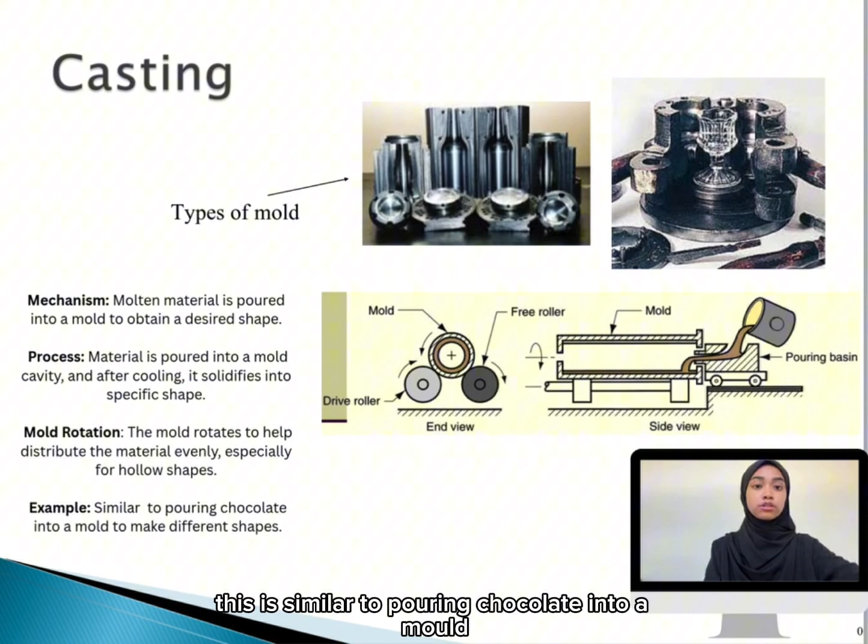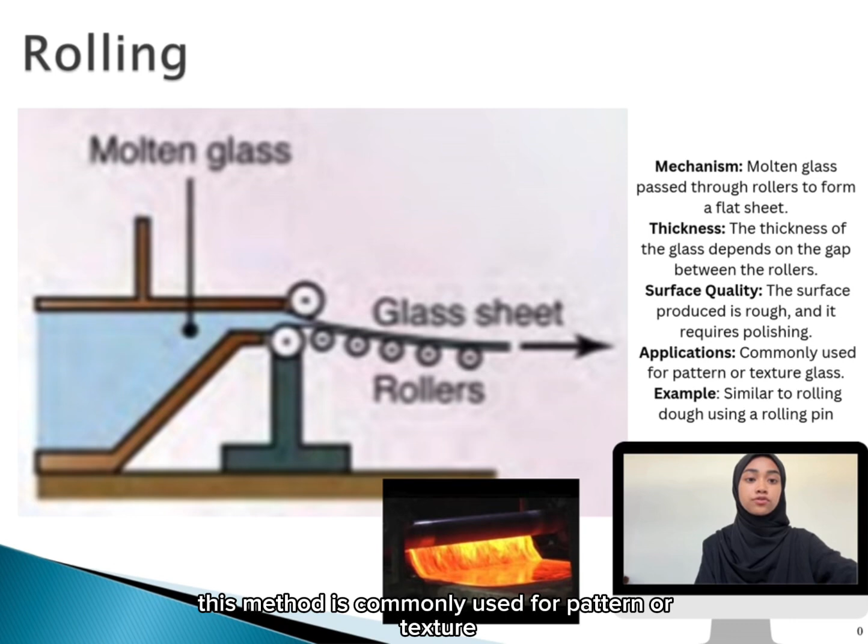Next, in the rolling process, molten glass is passed through rollers to form a flat sheet. The thickness of the glass depends on the gap between rollers. However, the surface produced is not very smooth, so additional polishing is required. This method is commonly used for patterned or textured glass. It is similar to rolling dough using a rolling pin.

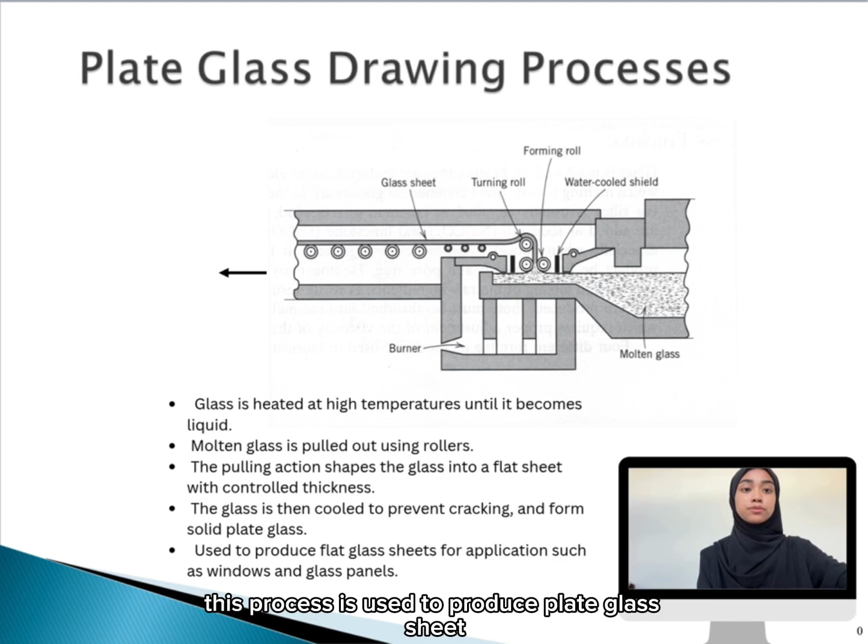In plate glass drawing, the glass is heated at high temperature until it becomes liquid. Then, the molten glass is continuously pulled out using rollers. After that, the pulling action shapes the glass into a flat sheet with controlled thickness. The glass is then cooled to prevent cracking. Finally, it forms solid plate glass. This process is used to produce plate glass sheets for applications such as windows and glass panels.

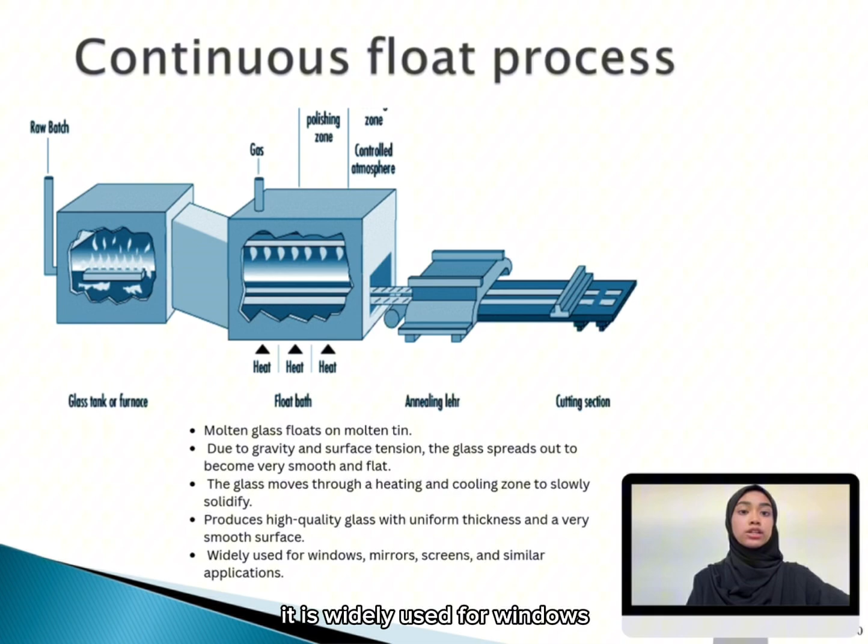Next, the float process is the most important modern method for producing plate glass. In this process, molten glass floats on molten tin because of gravity and surface tension. The glass spreads out and becomes very smooth and flat. After that, the glass moves through heating and cooling zones to slowly solidify. This method produces high quality glass with uniform thickness and a very smooth surface. It is widely used for windows, mirrors, and screens. For example, like the Apple Store at TRX.

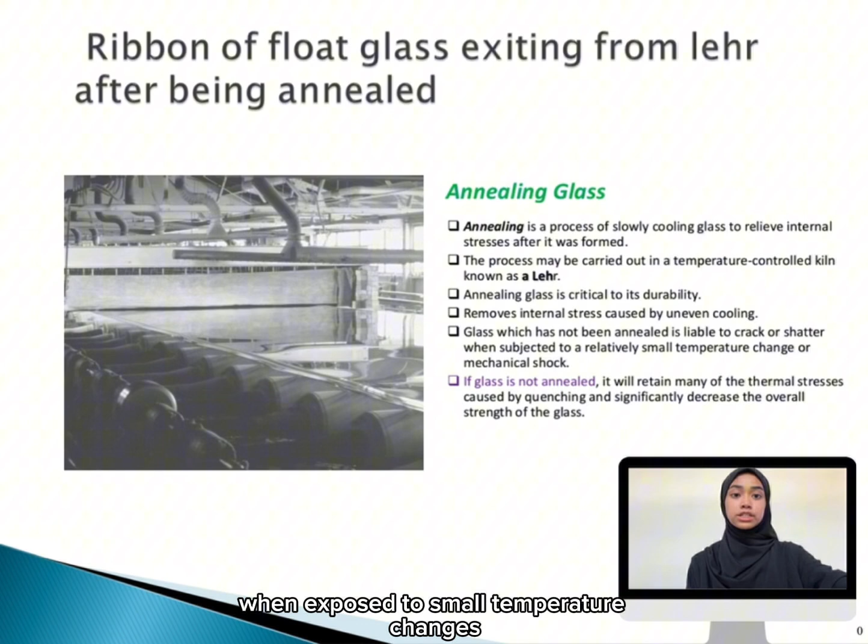Okay, next, annealing is a part of the float glass process. It is a controlled process used to remove internal stress in glass. Annealing is a crucial step in the float glass process to ensure the final product has good mechanical strength and is free from internal stress. Glass that is not annealed can easily crack or break when exposed to small temperature changes or impacts. If glass is not annealed, thermal stress from quenching remains inside the glass and reduces its overall strength.

So, let's look at the differences between the rolling process and the float process. In the rolling process, molten glass is passed through rollers to form a flat sheet. The thickness of the glass is controlled by the gap between rollers. However, the surface produced is usually rough and may require polishing. This process is simpler and cheaper and commonly used for patterned or decorative glass.

In floating, molten glass floats on molten tin and spreads naturally to form a flat and uniform shape. This method produces glass with a smooth surface without polishing. It is widely used for high-quality applications such as windows, mirrors, and modern building glass.

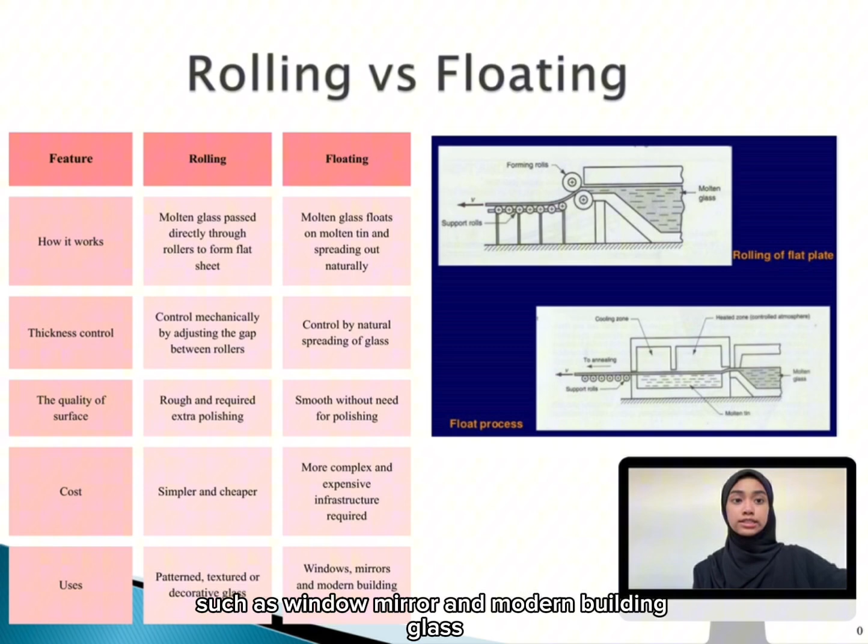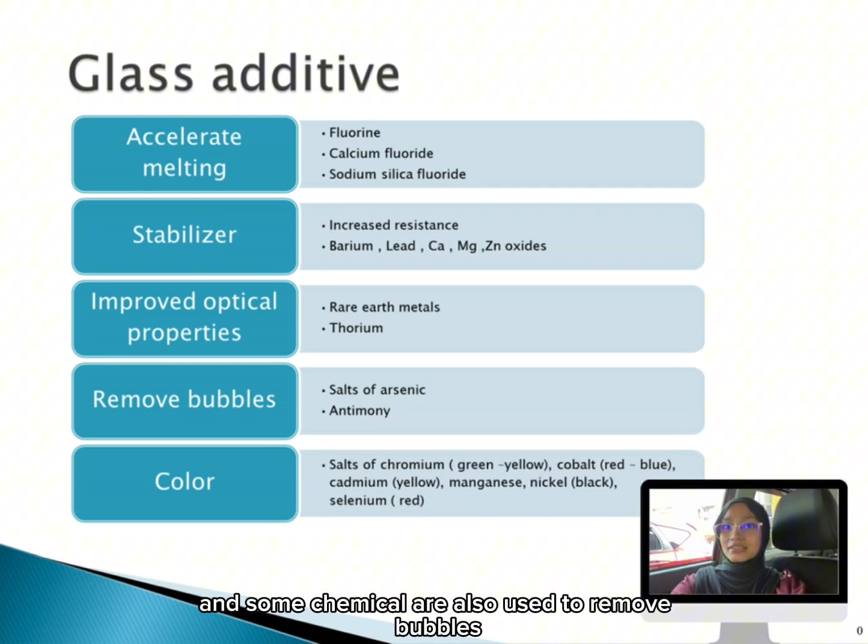First, chemicals are added to glass to improve its properties. For example, some chemicals help the glass melt faster, which saves energy during production. Others act as stabilizers to make the glass stronger and more durable. In addition, certain elements like rare earth metals improve optical properties, making the glass clearer, and some chemicals are also used to remove bubbles, while others give colors such as green, blue, or yellow.

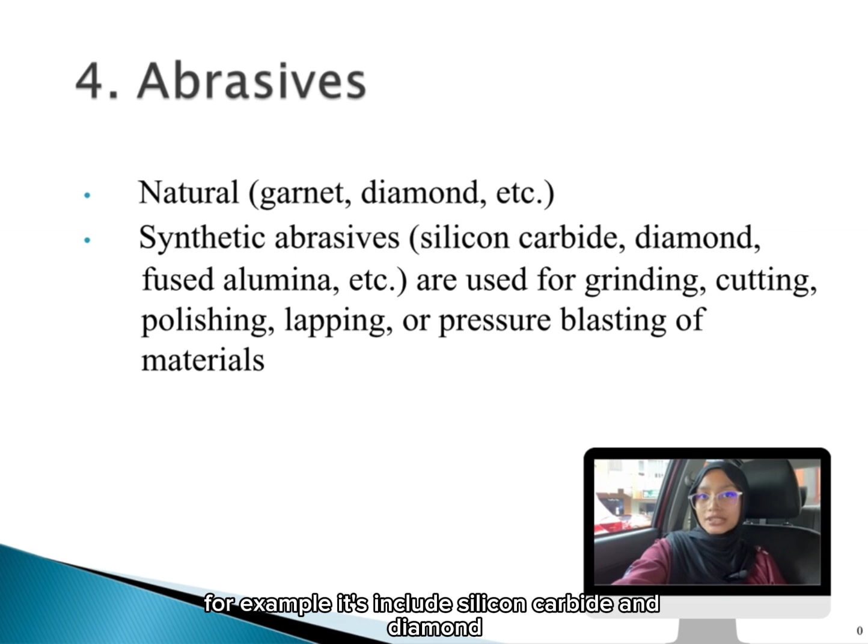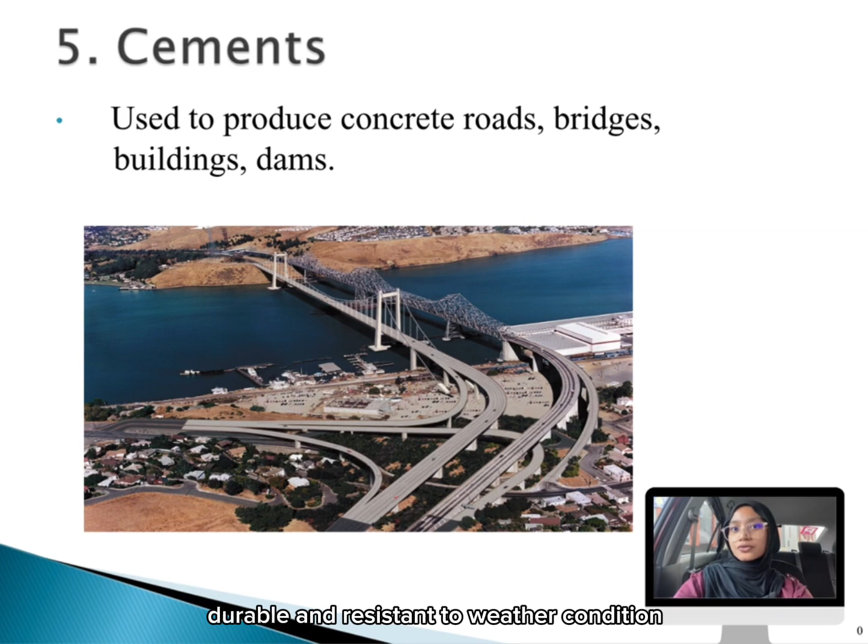Next, ceramics are widely used as abrasives. Because they are very hard materials, they are used for grinding, cutting, polishing, and cleaning surfaces through friction. For example, these include silicon carbide and diamond. Ceramics are also important in construction. They are used in roads, bridges, buildings, and dams because they are strong, durable, and resistant to weather conditions.

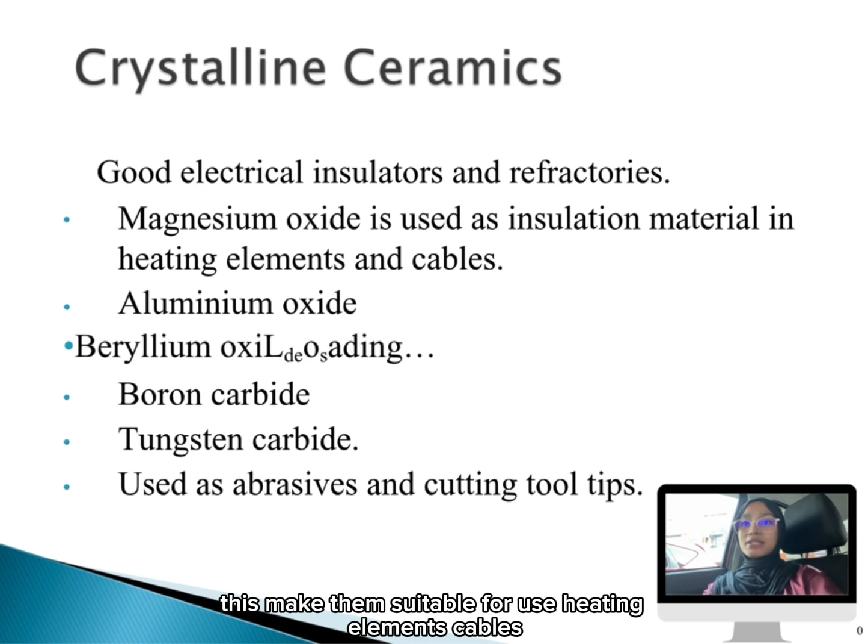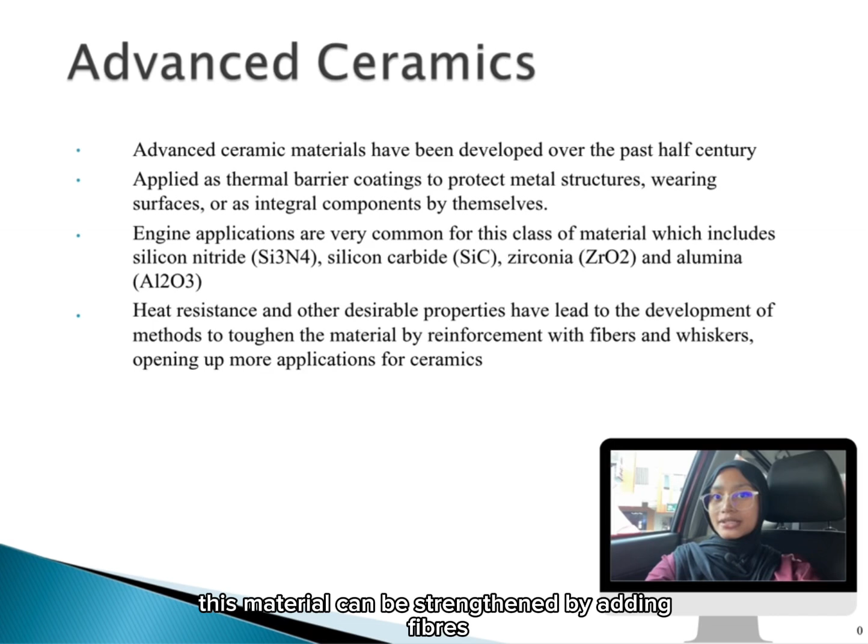Besides that, ceramics are good electrical insulators and can withstand high temperatures. This makes them suitable for use in heating elements, cables, furnaces, and reactors. Modern or advanced ceramics such as silicon carbide and zirconia are used in engines and high temperature environments. These materials can be strengthened by adding fibers, making them less brittle and more wear resistant.

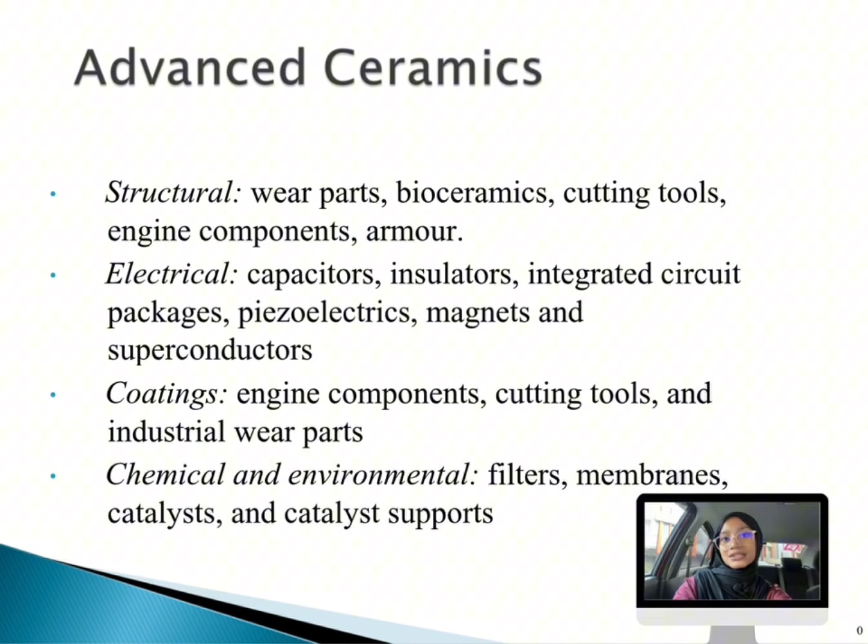Ceramics have many applications including structural uses like cutting tools, electrical components like capacitors, protective coatings, and also environmental uses such as filters and catalysts. Ceramics are important materials due to their hardness, heat resistance, and durability, although they can be brittle, which can be improved with modern techniques.

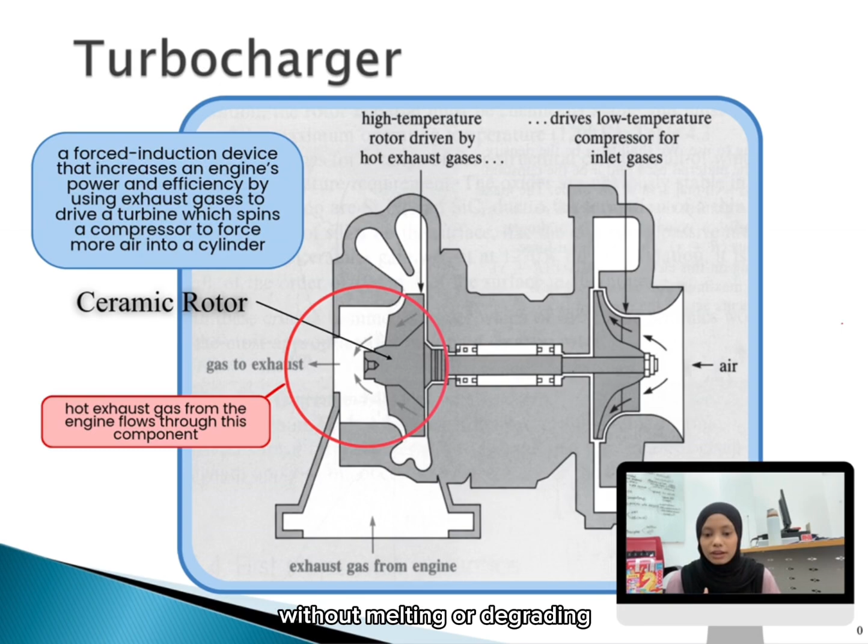A turbocharger is a forced induction device that increases an engine's power and efficiency by using exhaust gases to drive a turbine, which spins a compressor to force more air into the cylinder. So, if we look at the red circle, hot exhaust gas from the engine flows through this component. This part is exposed to a very high temperature, and ceramics are used here because they can withstand extremely high temperature without melting or degrading. They also have good thermal stability and do not react easily with gases.

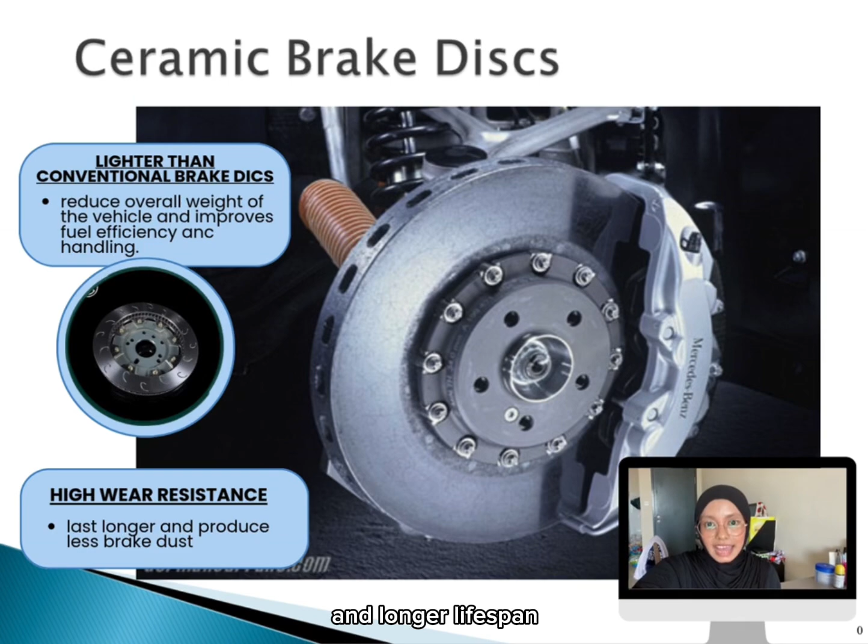Another advantage is their high wear resistance. They last longer and produce less brake dust. Therefore, ceramic brake discs provide better braking performance, improved thermal stability, and longer lifespan compared to conventional brake materials.

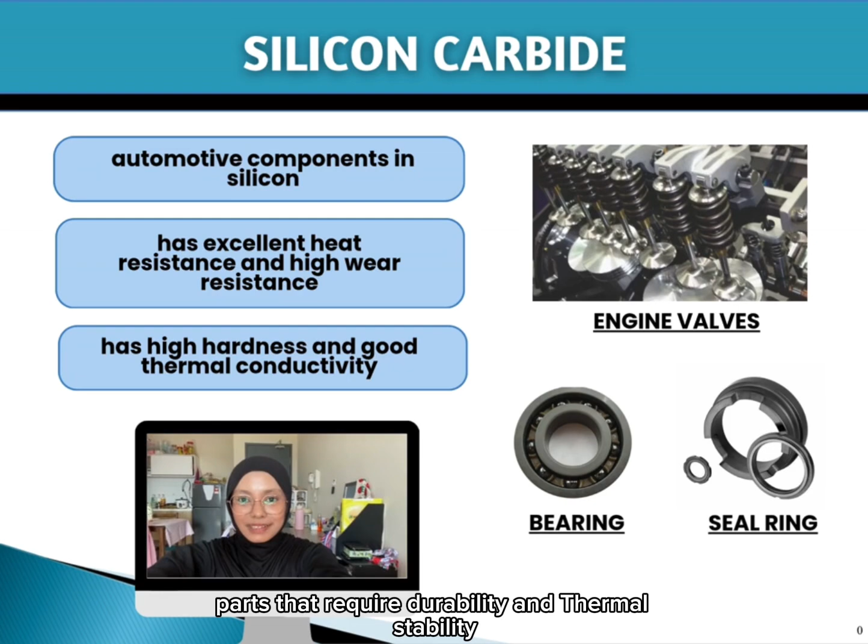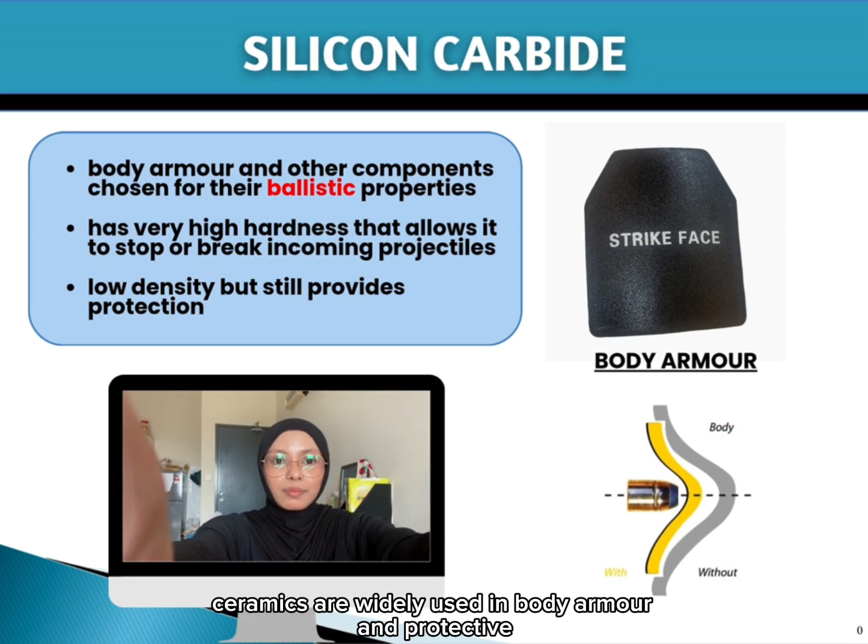Ceramic armor systems are used to protect military personnel and equipment. For the advantage, it has a low density of the material, as I have just said earlier, and that can lead to a weight-efficient armor system. Typical ceramic materials used in armor systems include alumina, boron carbide, silicon carbide, and titanium diboride. The ceramic material is discontinuous and is sandwiched between a more ductile outer and inner skin. The outer skin must be hard enough to shatter the projectile.

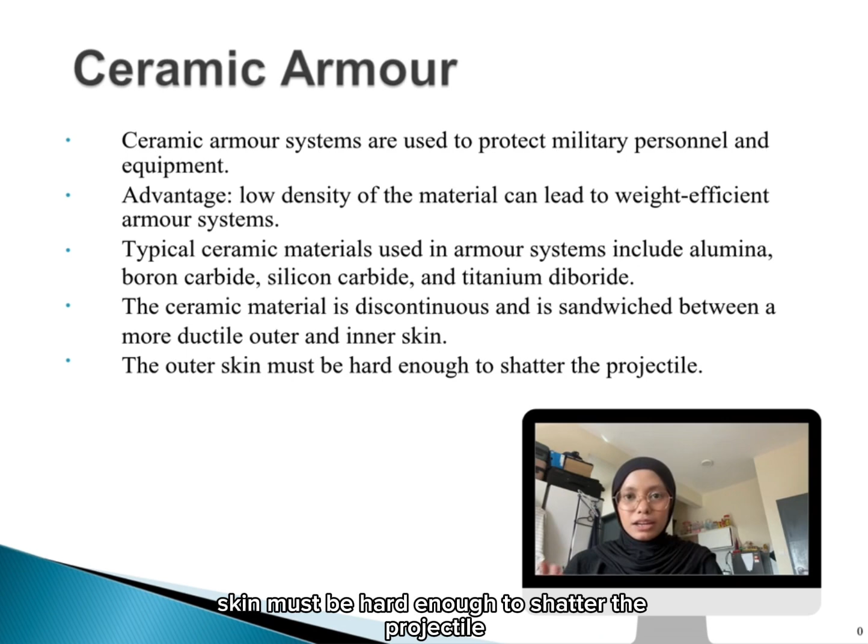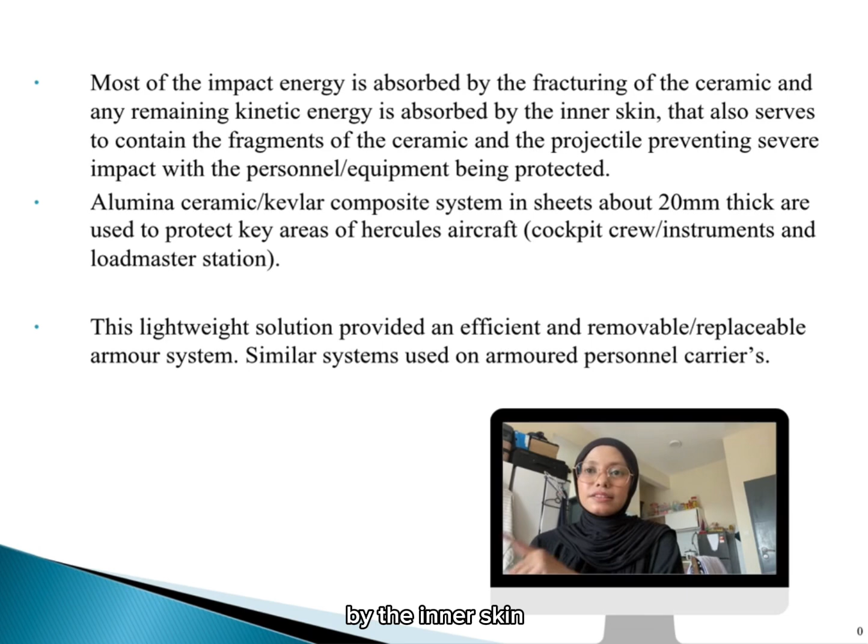Most of the impact energy is absorbed by the fracturing of the ceramic, and any remaining kinetic energy is absorbed by the inner skin, which also serves to contain the fragments of the ceramic and the projectile, preventing severe impact with the personnel or equipment being protected.

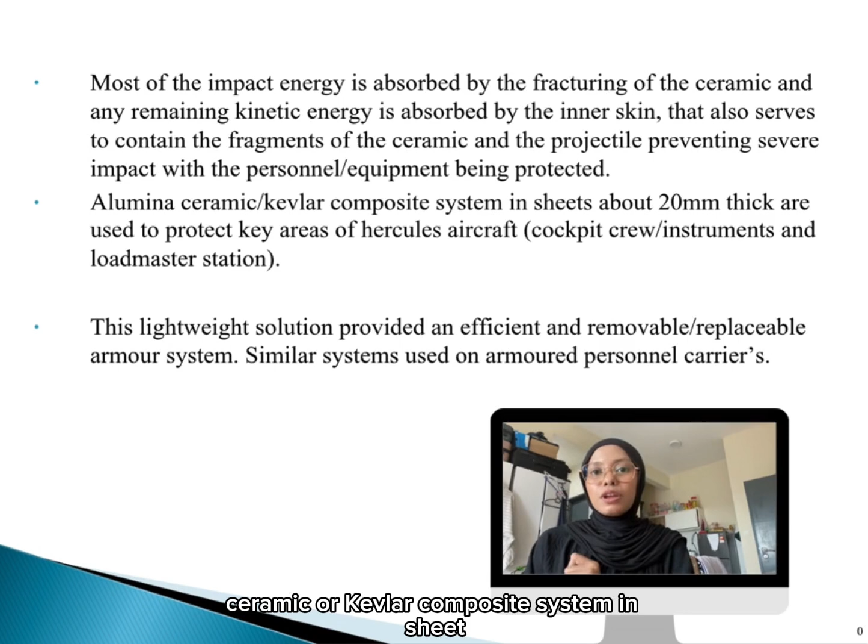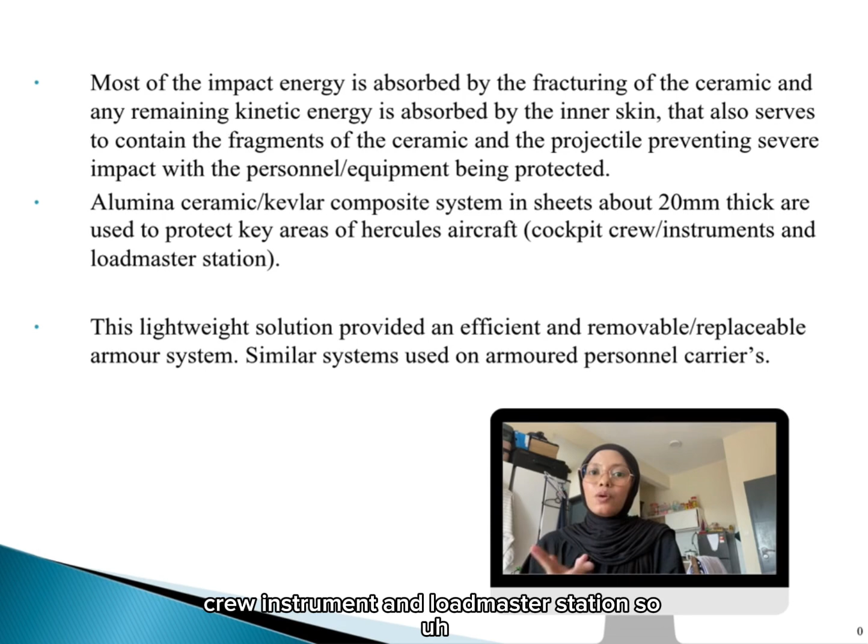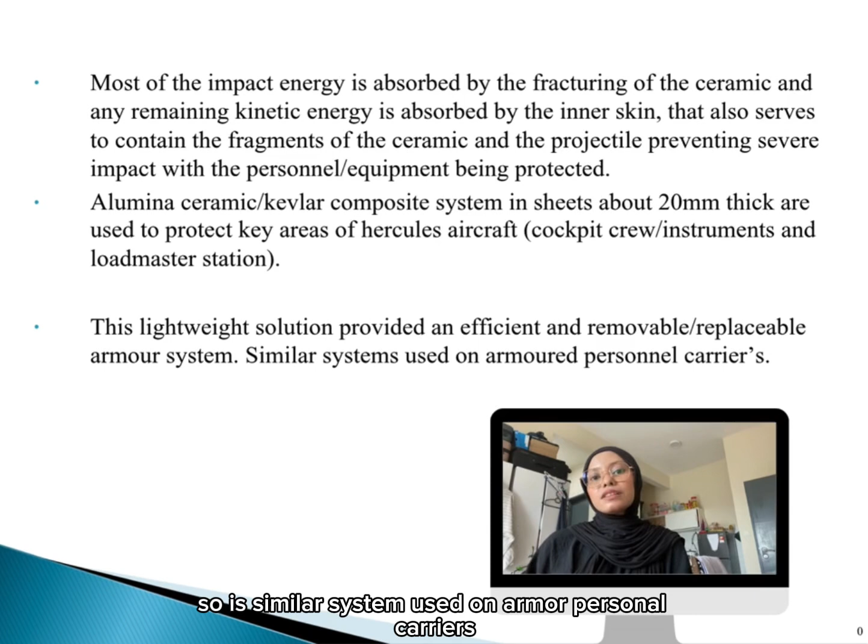And then, alumina ceramic/Kevlar composite systems in sheets about 20 mm thick are used to protect key areas of Hercules aircraft, which are the cockpit crew, instruments, and loadmaster station. This lightweight solution provided an efficient, removable, or replaceable armor system. A similar system is used on armored personnel carriers.